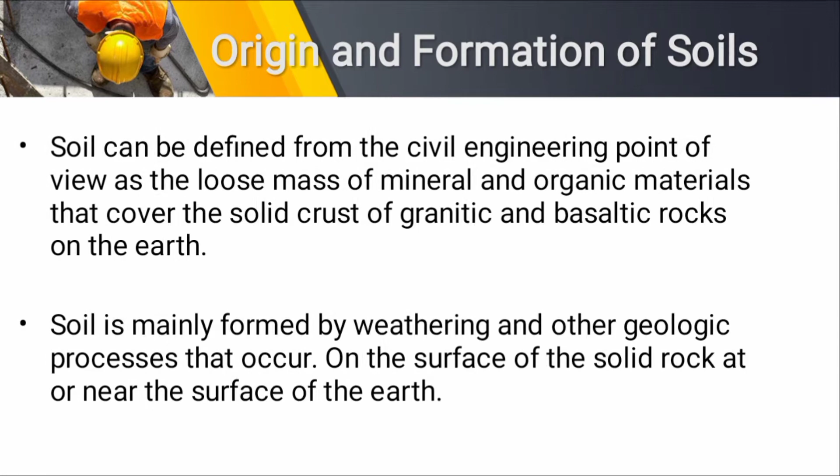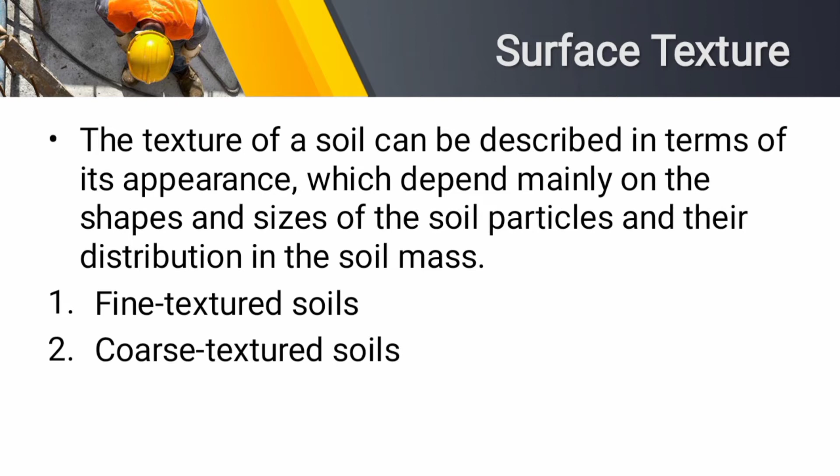Soil can also be characterized through surface texture. The texture of the soil can be described in terms of its appearance, depending primarily on the shape and size of the particles of the soil, as well as their distribution in the soil mass. It can be identified as fine textured soils, consisting mainly of silts and clay, which from the name itself have small particle sizes. Another classification is the coarse textured soil, known to consist of sand and gravel, which, unlike the first classification, has bigger particles.

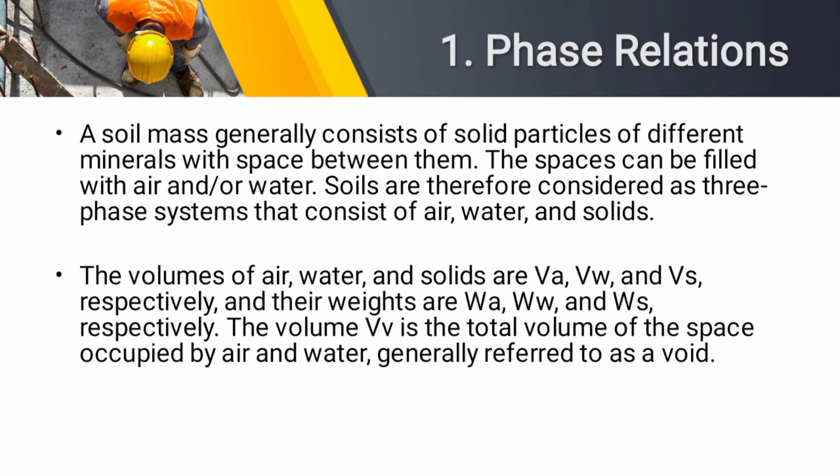Next, we have the basic engineering properties of soil. The basic engineering properties of soil are crucial for highway engineers to be familiarized with, since these influence the behavior of the soil when it is subjected to external loads. Of these engineering properties, we have phase relations. We all know that soils are primarily constituted of various minerals of different sizes, and between them are spaces. The spaces, which are called voids, can be filled with air and/or water. Therefore, the soil is considered to have a three-phase system consisting of air, water, and solid materials. Under the phase relations, we have porosity, void ratio, moisture content, degree of saturation, density of soil, specific gravity of soil particles, and other relationships.

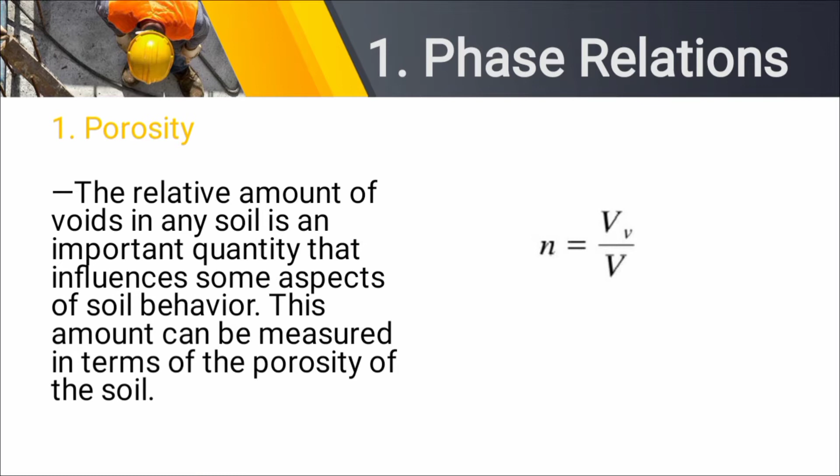We have to take note that the relative amount of voids in any soil is an important quantity that affects some aspects of soil behavior. This amount can be measured in terms of the porosity of the soil. The equation is defined as porosity is equal to the total volume of space occupied by air and water, or the void, over its total volume. Next, we have the void ratio. The amount of voids can also be measured in terms of void ratio, as denoted by the equation void ratio is equal to the volume of the void over the volume of the solids.

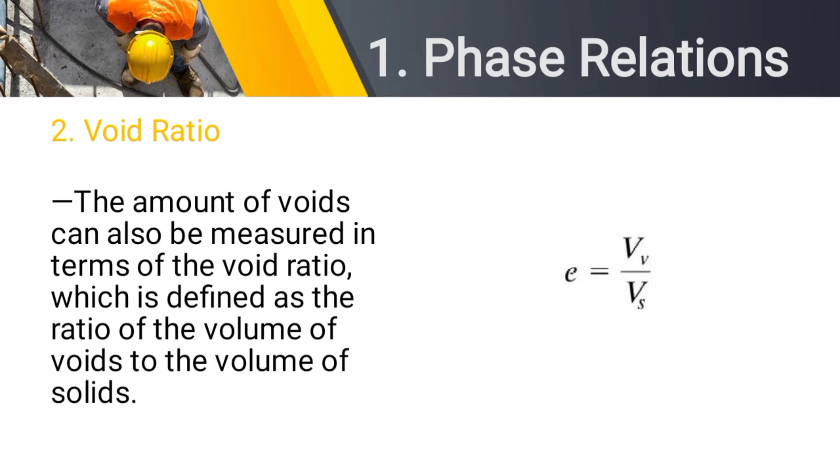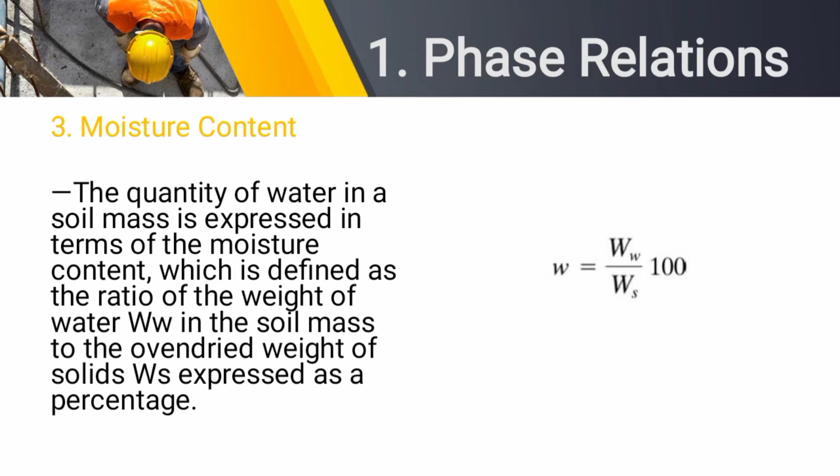Next, we have the moisture content. From the word itself, moisture is the quantity of water in a soil mass, which is defined by the equation moisture content is equal to the weight of water over the oven-dried weight of solids multiplied by 100. Take note that the moisture content is expressed in percent. Another one is the degree of saturation. It is described as the percentage of void space occupied by water. This is derived from the equation degree of saturation is equal to the volume of water over the volume of the void multiplied by 100.

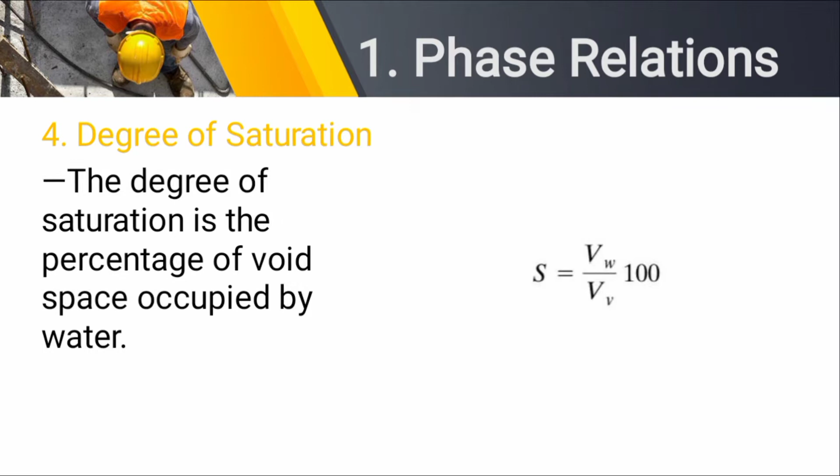Next, we have the density of soil. It is one of the useful soil properties that is essential to highway engineers. The density is the ratio that relates the mass side of the phase diagram to the volumetric side. There are three densities commonly used in soil engineering. First, we have the bulk density or the total density.

Total density is equal to the ratio of the weight and the volume of the given sample, or is equated to oven-dried weight of soil plus weight of water all over the volume of the solid plus volume of water plus the volume of the air. We have to take note that the air is negligible.

For saturated soil, the equation for total density is given as equal to the weight of the soil over the volume of the given sample, which is also equated to the oven-dried weight of solid plus weight of water all over the volume of solid plus volume of water.

Second, we have the dry density. Dry density is equal to the oven-dried weight of solid over the volume of the sample, which is also equated to the weight of solid over volume of solid plus volume of water plus volume of air, which is also equal to the total density over 1 plus W.

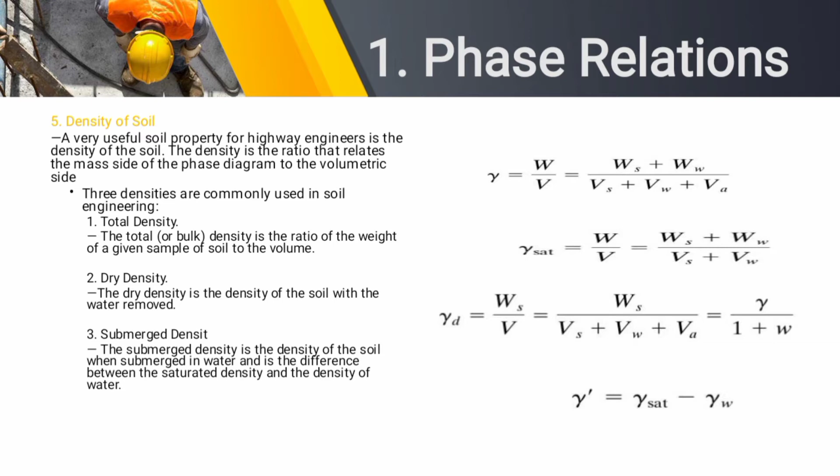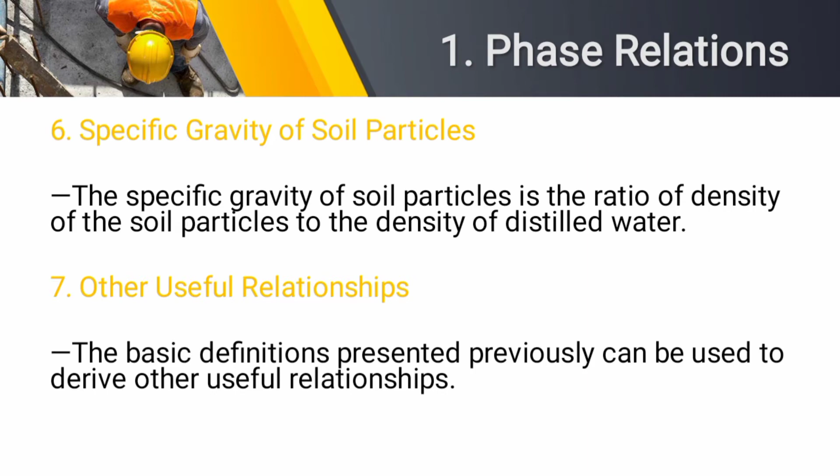Third is the submerged density. Simply denoted as submerged density is equal to the saturated density minus the density of the water. We also have the specific gravity of soil particles. It is defined as the ratio of the density of the soil particles to the density of the distilled water. We can also derive other useful relationships presented previously with the basic definitions of phase relations.

Another soil property that we have to understand is the Atterberg limits. Clay soils with very low moisture content will be in the form of solids. As the water content increases, however, the solid soil gradually becomes plastic. That is, the soil easily can be molded into different shapes without breaking up. The stiffness or consistency of the soil at any time, therefore, depends on the amount of the water present in the soil. From this, the Atterberg limits are the water content levels at which the soil changes from one state to the other.

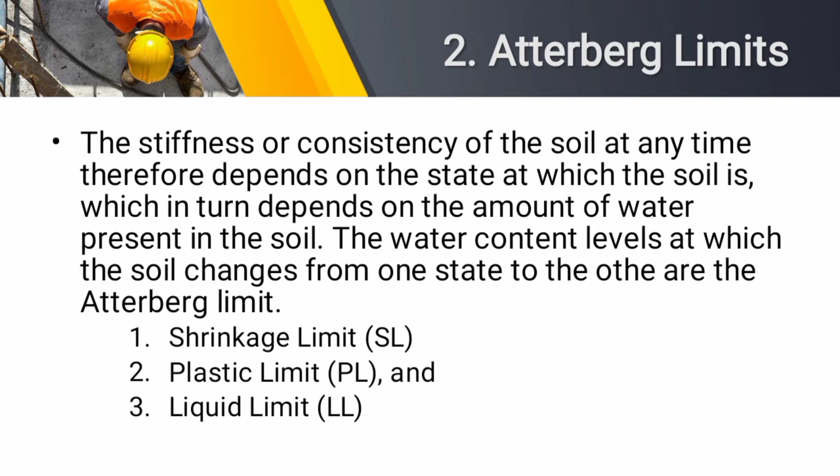Under the Atterberg limits, we have the shrinkage limit, plastic limit, and liquid limit. First, we have the shrinkage limit. When a saturated soil is slowly dried, the volume shrinks but the soil continues to contain moisture. Continuous drying of the soil, however, will lead to a moisture content at which further drying will not result in additional shrinkage. The volume of the soil will stay constant and further drying will be accompanied by air entering the voids. The moisture content at which this occurs is the shrinkage limit or SL of the soil.

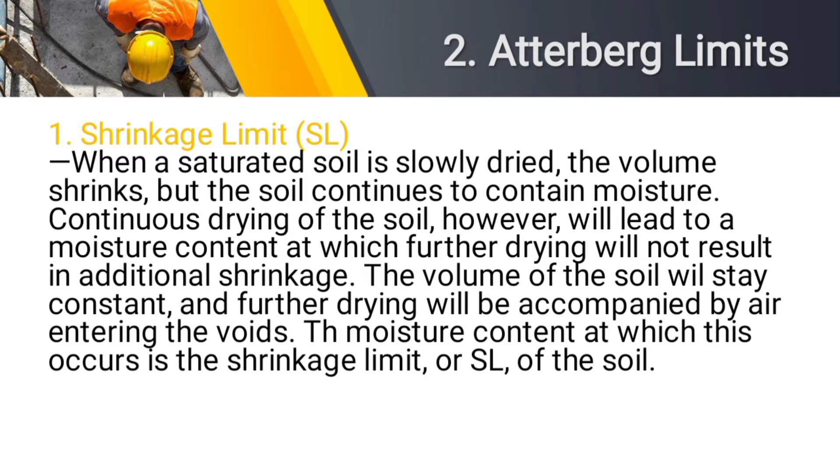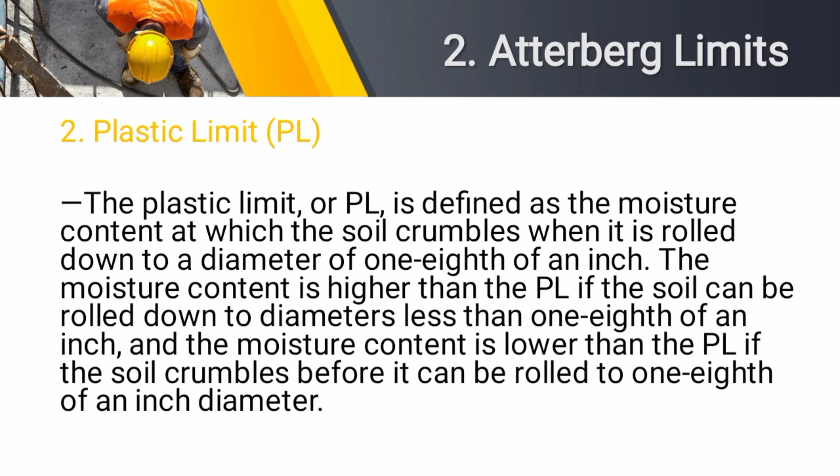Second, we have the plastic limit. Plastic limit or PL is defined as the moisture content at which the soil crumbles when it's rolled down to a diameter of 1/8 of an inch. The moisture content is higher than PL if the soil can be rolled down to a diameter of less than 1/8 of an inch, and the moisture content is lower than the PL if the soil crumbles before it can be rolled to 1/8 of an inch diameter.

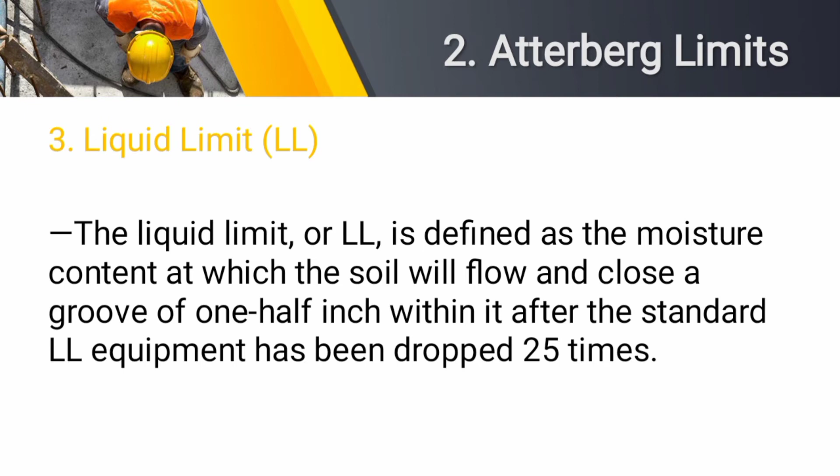Third, we have the liquid limit. The liquid limit or LL is defined as the moisture content at which the soil will flow and close a groove of 1/2 inch after the standard LL equipment has been dropped 25 times. We also have to take note that in determining the plasticity index, we have to find the difference between the liquid limit and the plastic limit.

We also have the liquidity index. As stated in the definition, liquidity index is equal to the natural moisture content of the soil minus the plastic limit all over the plasticity index. We also have the permeability of the soil, which is defined as the property that describes how water flows through the soil and is given as the velocity of the water in the soil is equal to the coefficient of permeability multiplied by the hydraulic gradient.

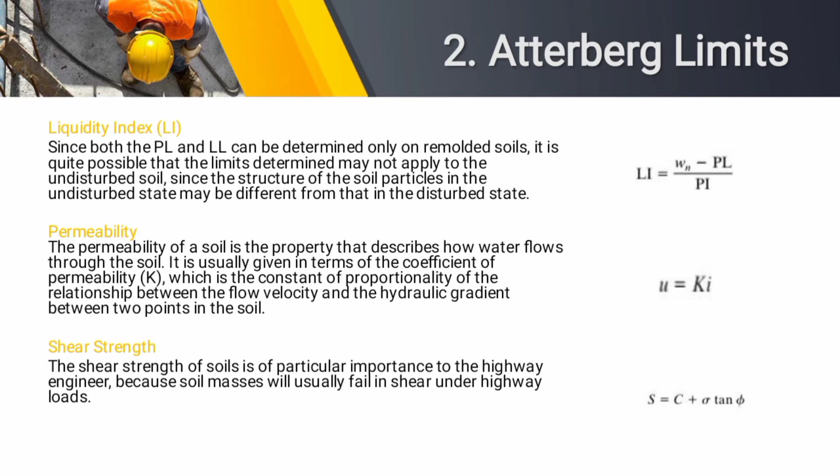Lastly, we have the shear strength, which is important for highway engineers since soil masses will usually fail in shear under highway loads. It is denoted as shear strength is equal to the cohesion expressed in pounds per square foot plus the normal stress on the shear plane expressed in pounds per square foot multiplied by the tangent of the angle of internal friction. Another topic under this report is the classification of soils for highway use.

The systematic categorization of soil according to their probable engineering characteristics is a method defined as soil classification. This is a process of identifying appropriate and suitable materials to be used on the subbase and examining the probable behavior of the soil when used as subgrade material. It is an important step in highway engineering as the classification of soil becomes a great way of obtaining a general idea of how the soil will behave if used either as subgrade or subbase material. The American Association of State Highway and Transportation Officials (AASHTO) Soil Classification System and the Unified Soil Classification System (USCS) are used in this process.

First, let us discuss the AASHTO Soil Classification System. This classification system is described as a means for determining the relative quality of soil for use in embankments, subgrades, subbases, and bases. Generally, the suitability of a soil deposit for use in highway construction can be summarized as follows.

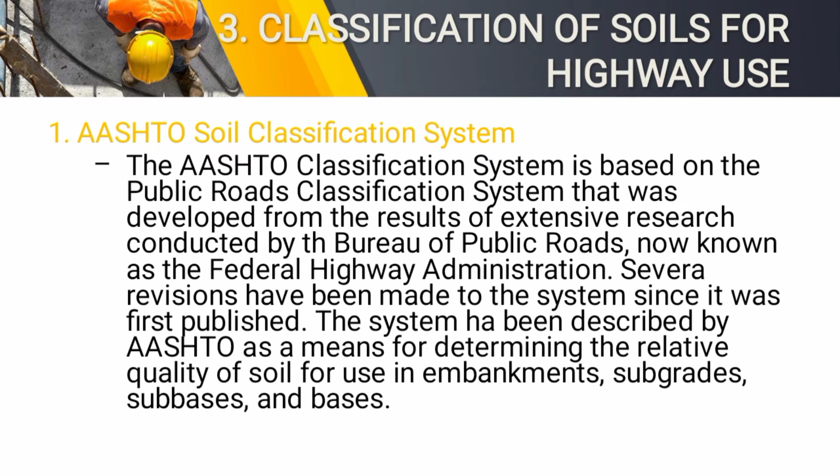And third, when soils are properly drained and compacted, their value as subgrade materials decreases as GI increases. The table presented shows the AASHTO classification of soil and soil aggregate mixtures.

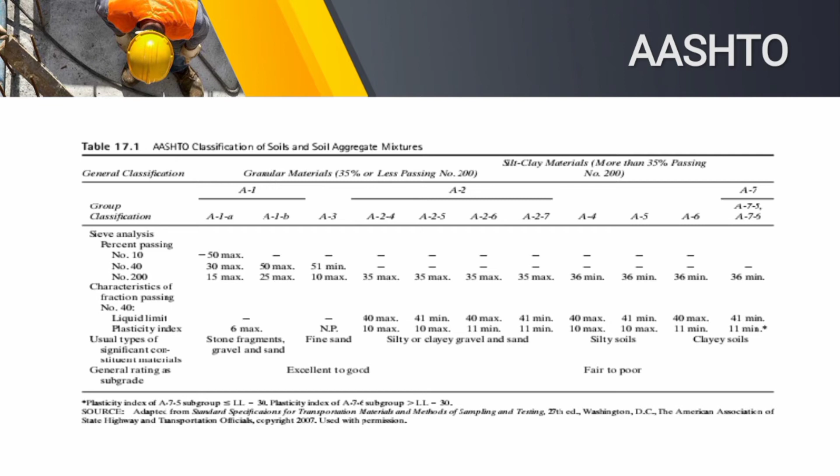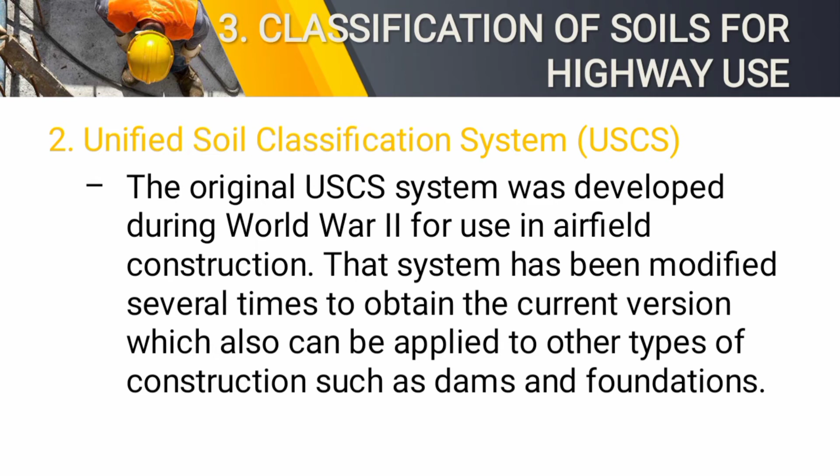Another subpart of this topic is the soil surveys for highway construction. This is a fundamental key concept in soil engineering. When we say soil survey for highway construction, we are pertaining to the investigation, examination, and analysis of the characteristics of the soil, specifically for the highway route. We are to identify the most suitable soil for use as the subbase and fill materials. It is a significant part of highway construction as the soil condition directly affects the location of the highway.

In this matter, we have the geophysical methods of soil exploration, namely the resistivity method and the seismic method. First, we have the resistivity method. The resistivity method is primarily based on the difference in electrical conductivity or resistivity of the different types of soil. An electrical field is produced in the ground by means of two current electrodes. The resistivity equipment is designed so that the apparent resistivity can be read directly on the potentiometer. From this, the data for the soil profile are gathered by moving the electrodes along the center line of the proposed highway, without changing the spacing.

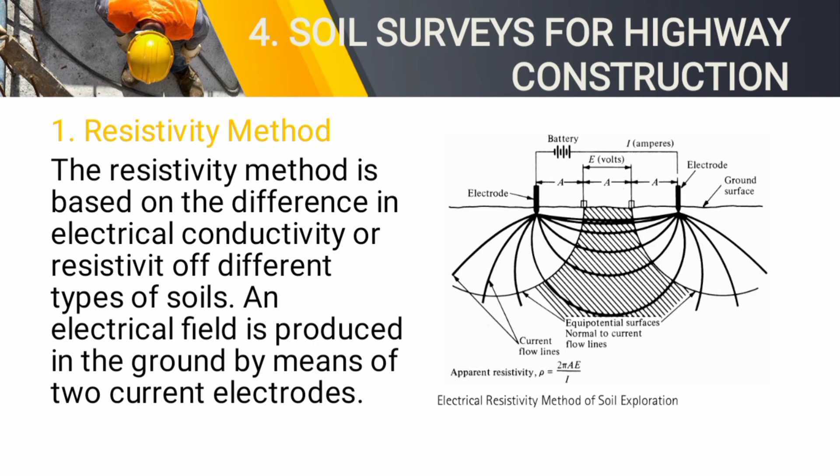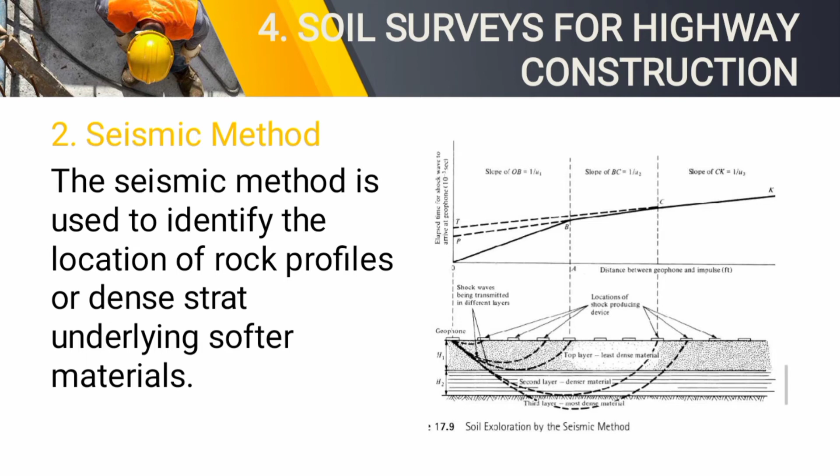Another geophysical method for soil exploration is the seismic method. The seismic method is used to identify the location of rock profiles or dense strata underlying softer materials. During this process, impact or shock waves are induced into the soil, either by striking a plate located on the surface with a hammer, or by exploding small charges in the soil. The seismic test is conducted by moving the shock-producing device along the proposed center line of the highway. The shock is produced at known distances from the geophone.

Another subtopic of this report is soil compaction. In soil engineering, or specifically for highway engineering, the process of compacting the soil remains a crucial stage. It is important that the material to be placed is uniform and is compacted to a high density. Proper compaction of soil is observed in order to reduce the subsequent settlement and volume change to a minimum. With this, the strength of the embankment or subbase is enhanced and ensured.

Under soil compaction, we have the optimum moisture content. The optimum moisture content of any soil to be used as either an embankment or a subgrade material must be determined first before doing any field work. Nowadays, most are using the dynamic or impact test to determine the optimum moisture content as well as the maximum dry density.

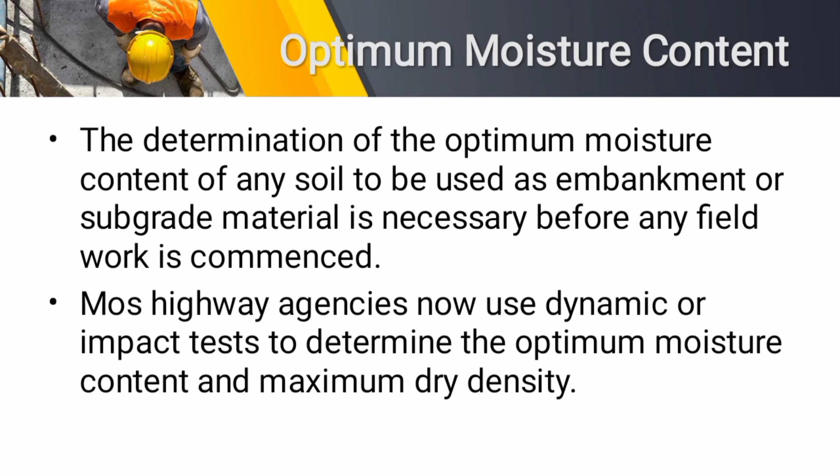Next, we have the field compaction procedures and equipment. For field compaction procedures, we have to take note that the first step in the highway embankment is to identify and select the suitable material. It can be done through economically feasible borrow pits or borrow areas and testing them in the laboratory to determine the group of each.

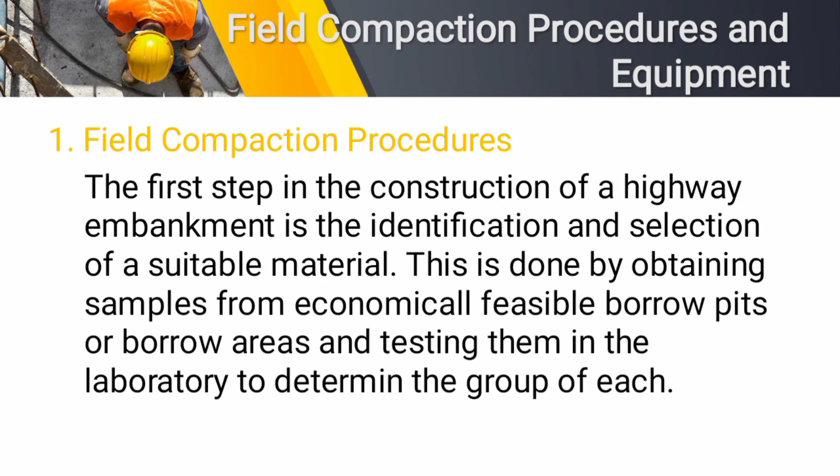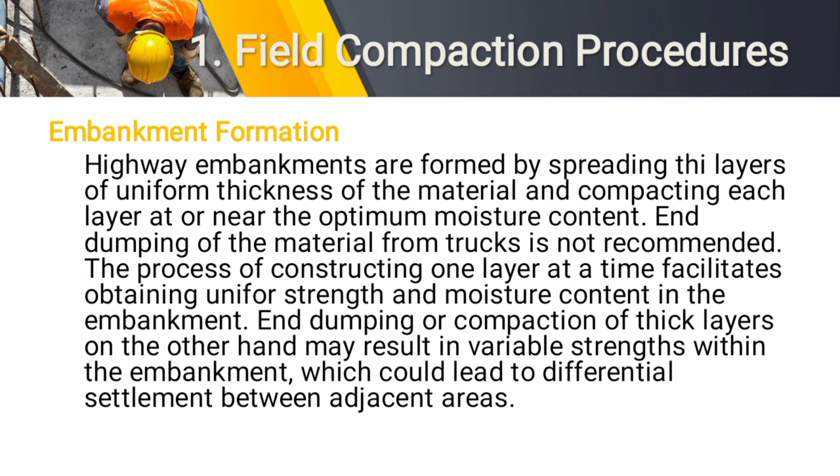Under the field compaction procedures, we have the embankment formation. The formation of highway embankments is done by spreading thin layers of uniform thickness of the material and compacting each layer at or near the optimum moisture content. It is not recommended to use end dumping of materials from trucks. In this process, constructing one layer at a time is essential to achieve uniform strength and moisture in the embankment.

Next, we have the control of embankment construction. Embankment construction control deals with frequent and regular checks primarily on the dry density and moisture content of the compacted materials. The measurement obtained in the field is directly the basis for obtaining the bulk density. Hence, the dry density is calculated from the bulk density and moisture content. The test is conducted through two methods.

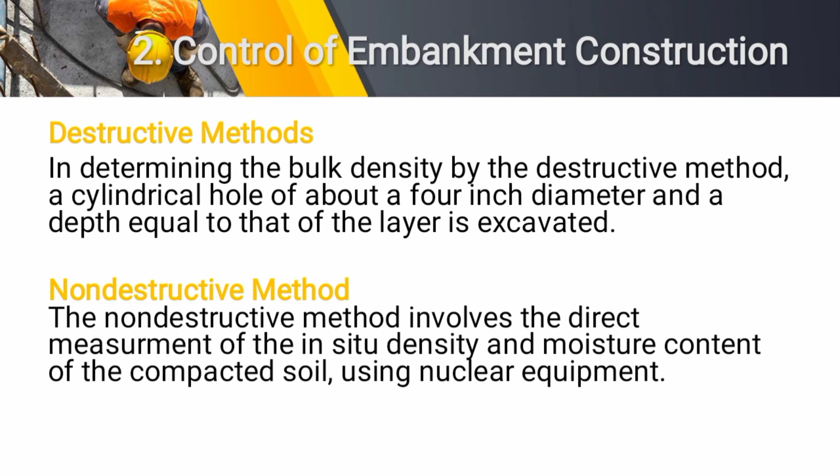Either of the two can be utilized. In the destructive method, a cylindrical hole of about 4 inches in diameter and a depth equal to that of the layer is excavated to determine the bulk density, while the non-destructive method involves the direct measurement of the in situ density and moisture content of the compacted soil. Unlike the destructive method, it utilizes nuclear equipment.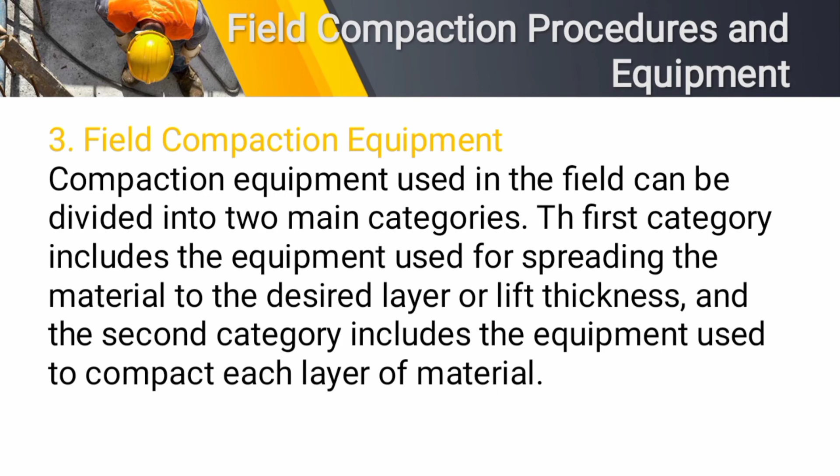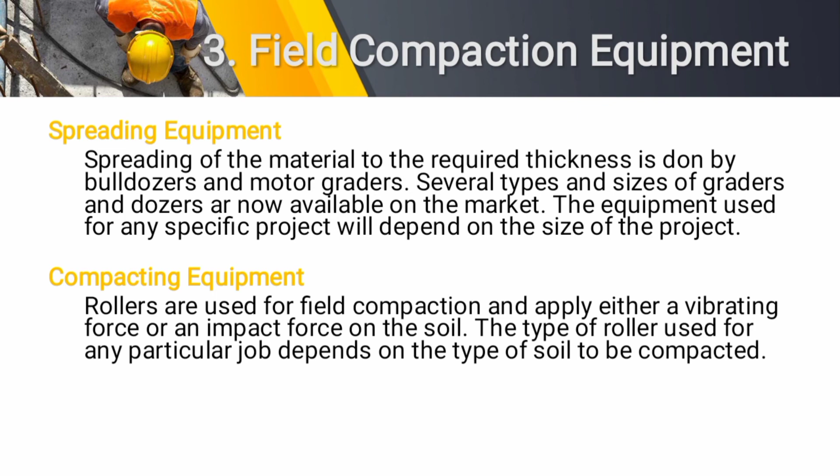Next, we have the field compaction equipment. In field compaction, the compaction equipment is divided into two categories: spreading equipment and compacting equipment. Spreading equipment include bulldozers and motor graders for spreading the materials to the required thickness. Meanwhile, compacting equipment include rollers and apply either a vibrating force or an impact force on the soil.

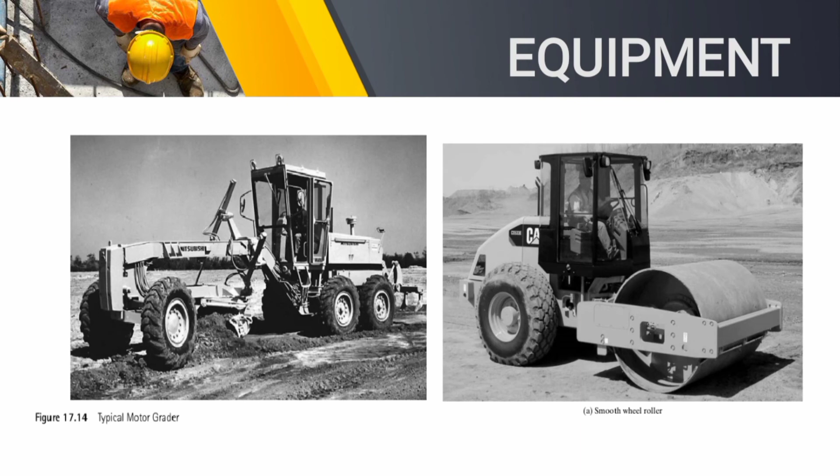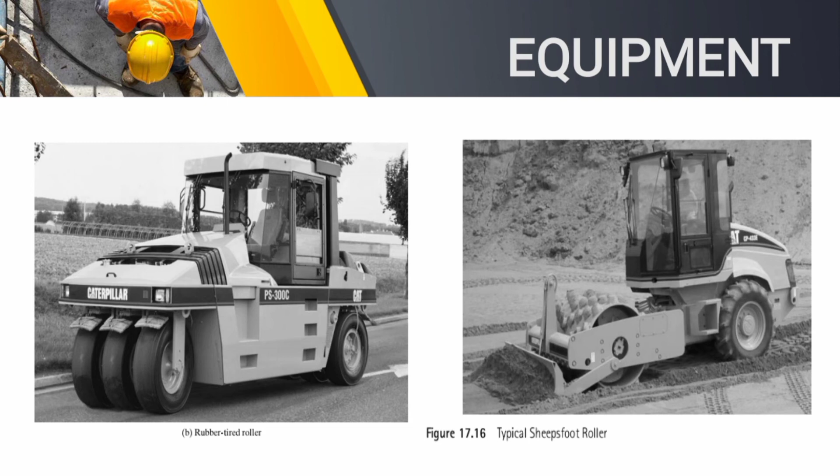Here are some of the equipment used in field compaction. We have the motor grader, smooth wheel roller, rubber tired roller, and sheepsfoot roller. Most of this equipment is readily available in the market.

The next subtopic we have is the special soil tests for pavement design. There are still a few tests used in determining the strength or supporting value of a given soil, especially when used as a subgrade or subbase material. Two of the most commonly used tests, specialized only for certain categories, are the CBR test and the Hveem stabilometer test.

First, we have the California Bearing Ratio or the CBR test. This test determines the load deformation curve of the soil in the laboratory using standard CBR testing equipment. It is done on a sample of soil compacted to the required standard and immersed in water for 4 days. During this stage, the samples are loaded with a surcharge that simulates the estimated weight of pavement material the soil will support.

CBR is equal to the unit load for 0.1 inch piston penetration in the test sample, in pounds per square inch, over the unit load for 0.1 inch piston penetration in standard crushed rock, in pounds per square inch. Or, CBR is equal to the unit load for 0.1 inch piston penetration in the test sample over 1,000, multiplied by 100.

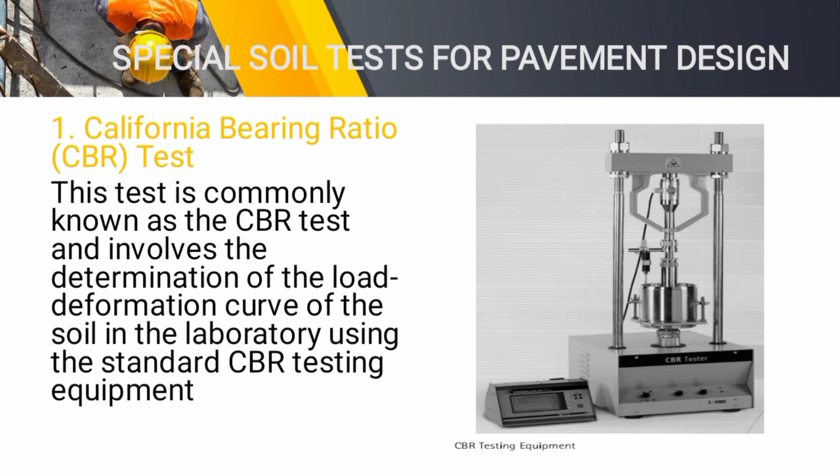Second, we have the Hveem stabilometer test. This test is generally used to determine the resistance value R of the soil to horizontal pressure obtained by imposing a vertical stress of 160 pounds per square inch on a sample of the soil. The value of R is essentially used in identifying the thickness of the pavement above the soil in order to carry the estimated traffic load.

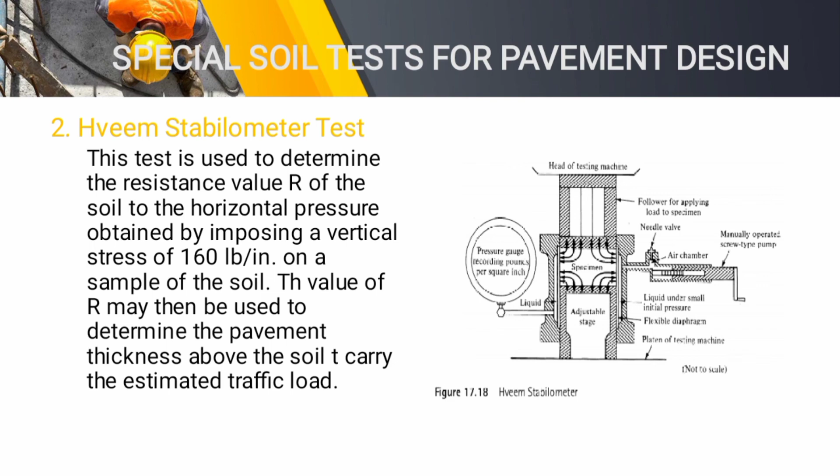Under this are the exudation pressure, which is defined as the compressive stress that will exude water from the compacted specimen. Next is the expansion pressure, which indicates the load and therefore the thickness of the required material above the soil to prevent any swelling if the soil is inundated with water when used as a subgrade material.

And lastly, the resistance value, referring to the schematic of the Hveem stabilometer used in the test. Resistance value R is equal to 100 minus 100 over the quantity 2.5 over D, the number of turns of the displacement pump, multiplied by the quantity Pv over Ph minus 1, plus 1.

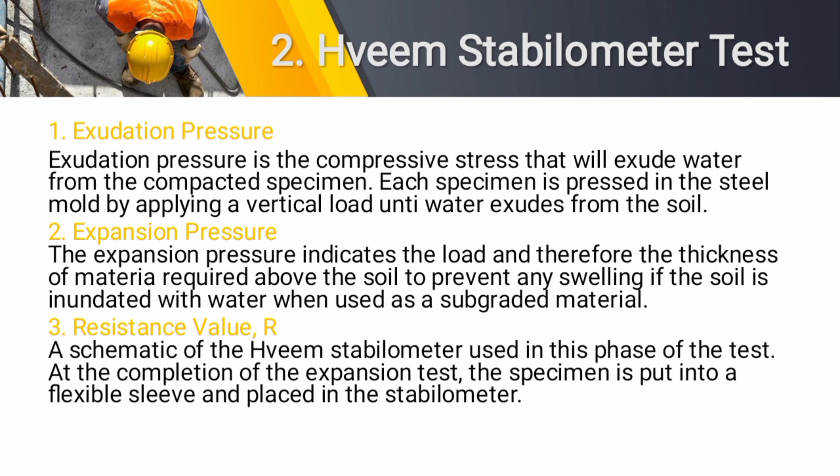The last subtopic we have is frost action in soils. When the temperature decreases, even falling to freezing point for several days, water in the soil pores will freeze, and that is something to be considered. There will be an increase in the volume of the soil, knowing that when water freezes, its volume increases by 10%. Not just that, ice crystals of considerable thickness may be formed in the soil.

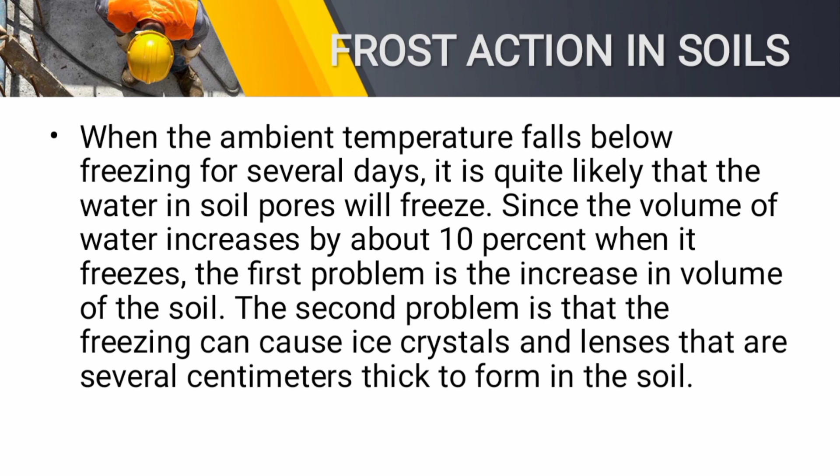In this matter, we have to consider three conditions for frost action to occur. First, the ambient temperature must be lower than freezing for several days. This condition is uncontrollable by humans, since it is a naturally occurring phenomenon. Therefore, it is more likely to occur in cold areas than in warm areas.

Second, a shallow water table that provides capillary water to the frost line must be available. In this condition, the groundwater table is required to be within the height of the capillary rise. This will help the water be continuously fed to the growing ice lenses.

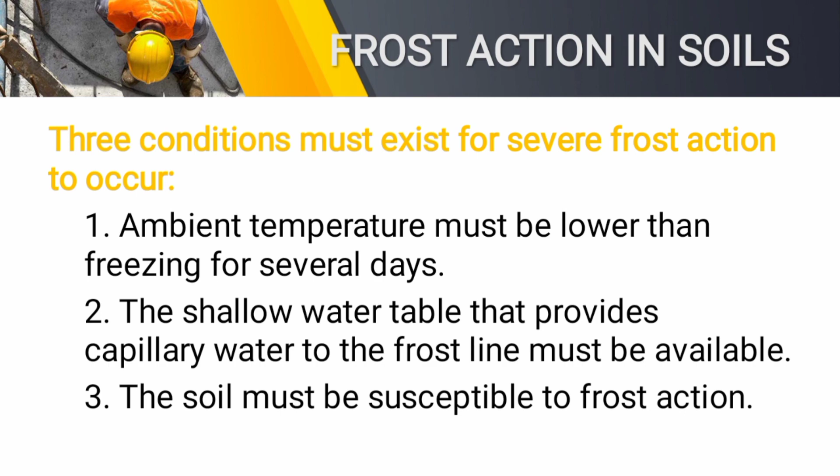And third, the soil must be susceptible to frost action. This condition requires that the soil be relatively high in terms of the capillary pressures that can be developed, but at the same time that the flow of water through its pores is restricted.

To briefly sum up, in the design and construction of any highway, the selection of suitable soil to be used is primarily important. For highway engineers or transportation engineers, familiarizing soil properties and how they are determined is a crucial task.